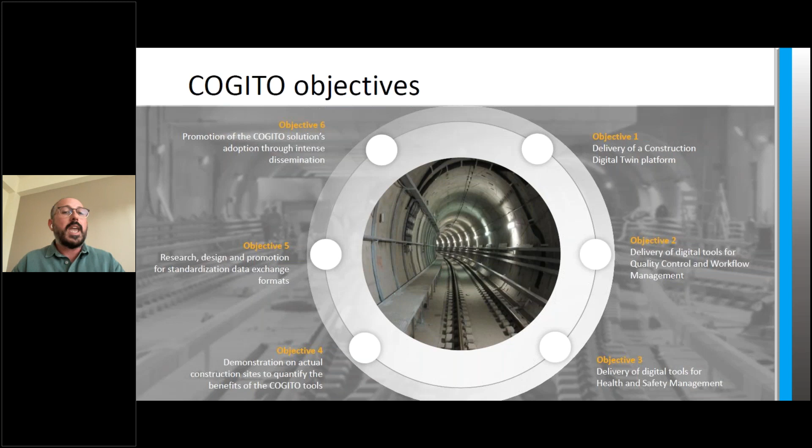Four technical objectives, fully aligned with the development and delivery of Cogito toolsets, and two business exploitation and knowledge transfer objectives have been set for the project implementation. The consortium so far has completed significant work aimed at delivering the key outputs associated with each.

Starting with objective number 4, suitable pre-validation and validation pilot sites have been identified and are currently being used to test many of the tools. From the pre-validation experiments and tests, significant learning has already been achieved that has led to various adjustments and corrections on the Cogito solution, input data requirements, and various Cogito tools' functionalities.

As for objective 5, Cogito aims to work with established standards towards large-scale adoption of the digital twin concept. In recent years, different standardization bodies have started working on the specification of standards for digital twins, and in the project we have followed and participated in such emerging initiatives, collaborating with our sister projects. Dissemination activities have focused on strong visibility of the Cogito project's tools and innovations in the construction industry at the European level.

Cooperation with the Building Digital Twin Association and StandICT allowed us to organize joint workshops and develop scientific papers with sister projects. Cogito representatives were promoting the project during several European and international events. Regarding the business approach and exploitation plans, Cogito partners developed business lean canvases following dissemination and exploitation manager instructions, and declared their intentions for exploiting the project's technical and non-technical results.

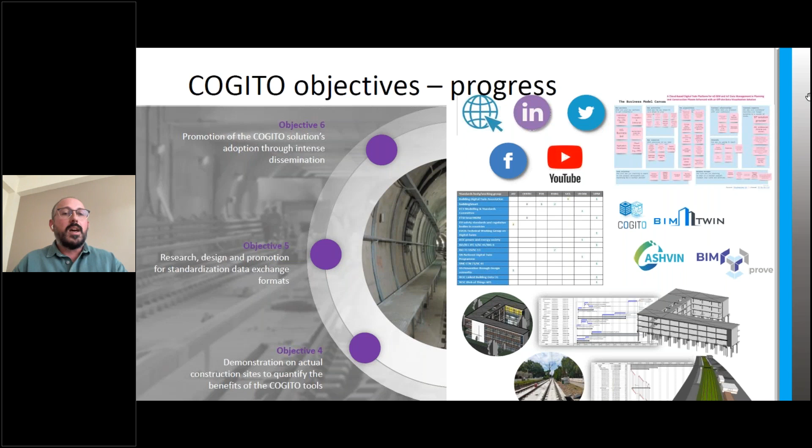In objective 1, the second and third versions of the Cogito data model and ontology definition, as well as interoperability design, the digital twin platforms that support both the necessary information management as well as the semantic and pragmatic alignment among the Cogito services and data processing systems.

The IoT data preprocessing tool gathers raw IoT data coming from sensorial devices installed on or worn on the construction site, and generates data sets that can be directly stored in the Cogito Digital Twin platform. The digital command center renders the 3D BIM model, IoT data, and other data and annotations generated by domain-specific digital twin applications like quality control, health and safety, and workflow management, all delivered so far.

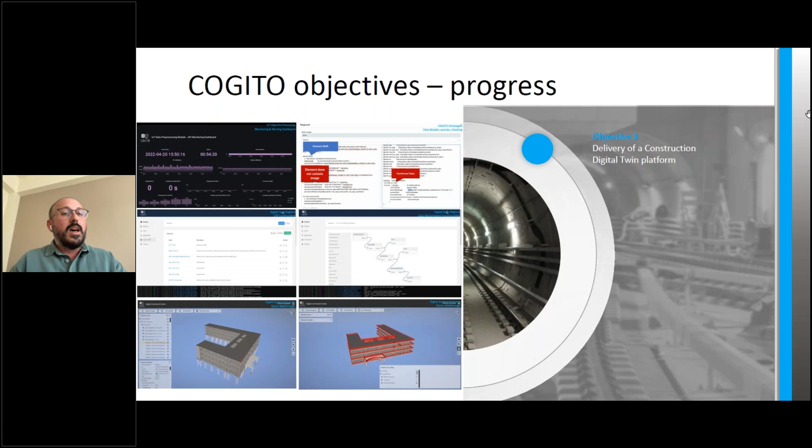As for objective 2, a tool used for defining work order templates, generating work orders, and executing or monitoring the defined workflow; a mobile app for supporting work order execution and reporting; a tool that allows the user to identify process steps that are critical for successful implementation of the project, exposing optimization opportunities to minimize time and cost; and a software package for commercial AR head-mounted displays to help visualize and interact in situ with the output of quality control tools, like severity of geometric visual defects, have also been delivered.

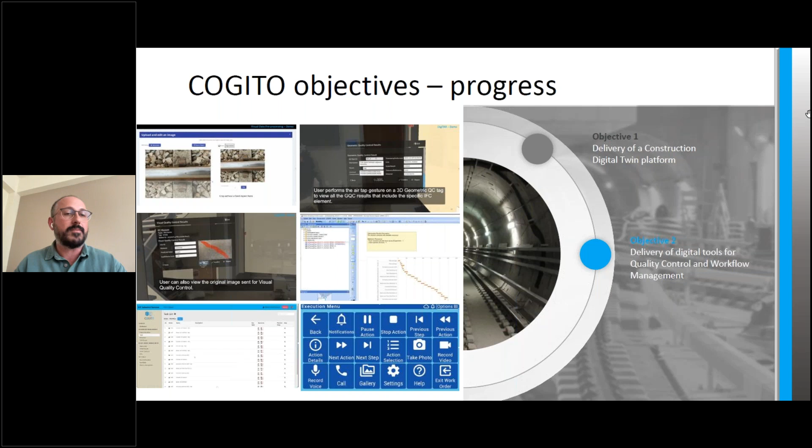Concluding this presentation, I would like to very briefly introduce the outcomes of objective 3, which will be further explained and presented in the next presentation given by Jochen.

I'm referring to the SafeConAI tool that identifies areas in the BIM model where hazards are, and suggests and adds mitigation measures to the model; the proactive safety tool that utilizes and analyzes location data of resources like equipment and personnel on the construction site to avoid close calls, accidents, and collateral damage; and the virtual safety tool that provides personalized construction safety education and training through an easy-to-use virtual reality environment.

That was the end of my presentation. Back to you, Emily.

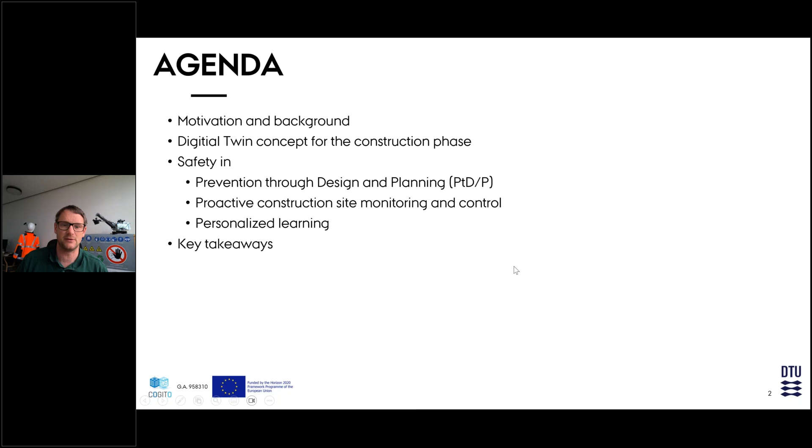The motivation, many of you are familiar with: construction is probably the most hazardous work environment that we have around the world, and especially fatalities occur. And numerous injuries, and a lot of attention has been put on close calls in the past decade, I would say, and still a lot of the injuries and fatalities and any incident is not going down to zero.

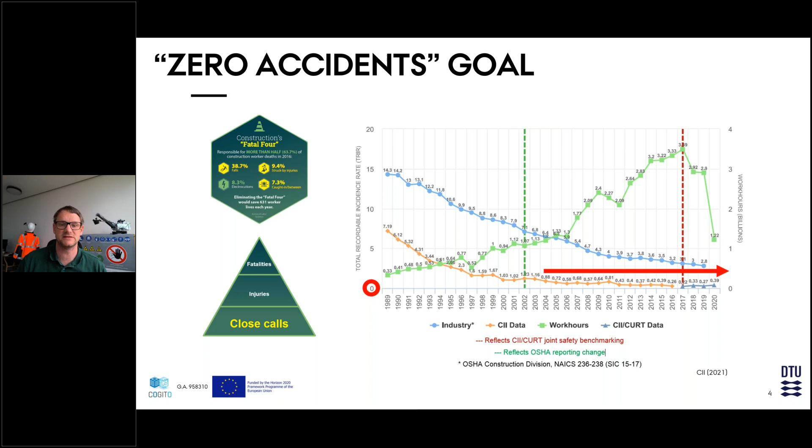Our goal is to actually use and create a digital twin that adds to the high-level control theories that exist for safety by complementing them with digitalization.

This is what a digital twin is all about. It's about capturing the current state of the art, actually thinking about how we can design safely and plan projects safely, collect data, even predict future events, and if they turn out to be dangerous, actually prevent them. And that's where this proactive avoidance comes in.

So digitalization should also not be seen as a replacement of workers, actually as a tool, as an aid to enhance the decision making. Why do I talk about that?

Just yesterday, there were 2 fatalities in Germany where a train actually ran into a work crew that was on the rail tracks. So it's actually quite an example that really has a lot of meaning for the COGITO project. So the next safety moment we have in the COGITO project, we want to devote to this tragic event that happened yesterday.

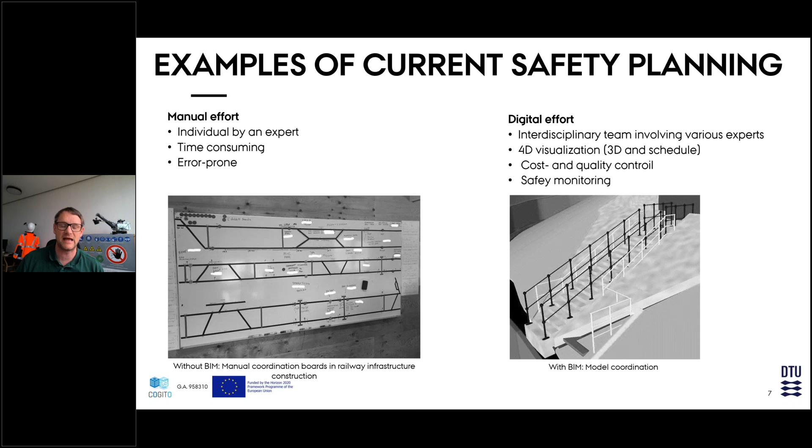And that's where COGITO is partially focusing on. So we want to get away with this by actually twinning safety and getting away from this linear approach, top down, like the CEO approving safety, rather thinking circular, like planning, monitoring, and making decisions better. That's what I think should be done to make the next project safe.

Then from experience to evidence, we have a lot of knowledge gathered over the past 30, 40 years. Construction is a very smart industry. We have a lot of best practices. We just need to capitalize on that. So we need to become evidence-based. That's what the digital twin is also about.

Yeah, we have a lot of data, but we just don't record it and use it. So we need to develop tools and methods to actually create evidence and then base our decision making and enhance it. And we need to be not reactive anymore, like I said, to safety statistics, rather being at the right time. It doesn't need to be real time, but at the right time.

Yeah, safety planning can happen upfront. Monitoring should happen probably in runtime, as quickly as technology is able to provide data from a construction site. And decisions should be then given real time if a worker is at imminent danger, or maybe a bit later when a safety manager wants to pull a record. How have we performed this week? So that's what a digital twin is about.

So let me show you a little bit of how our work package in COGITO is managed. And again, I don't have the time to explain this in detail, because we connect to the construction site. We also connect to a whole bunch of tools that are part of the digital twin platform, other tools that do work site planning, work process planning.

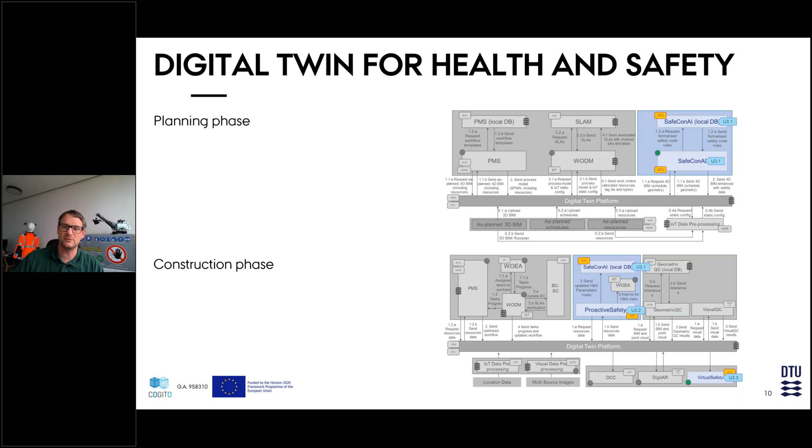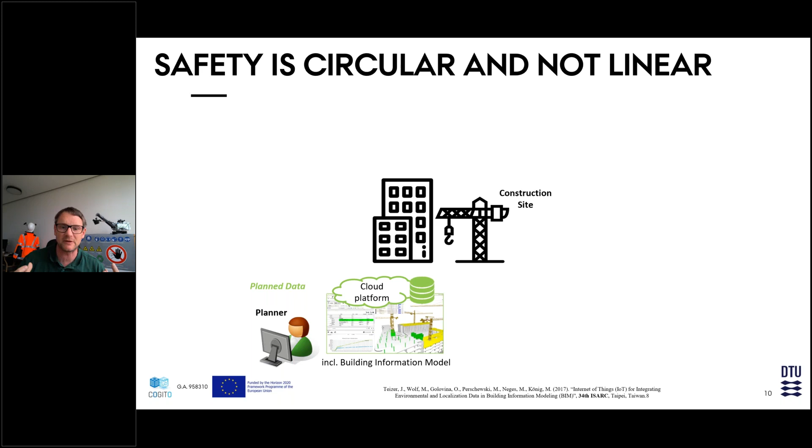We tie in on two levels: the planning phase and the construction phase. I've simplified this to give a better understanding. Here's a construction site. We develop safety tools for building information, which are 4D models containing geometric information as well as schedule information. We tie into that, capitalizing on already existing digital information.

We want to give work crews plans so they know where to go and how to work safely. We also want to give them tools and devices where they can report or be informed of hazards and how to avoid them. Furthermore, any data we record about ongoing activities on a job site, we record and analyze, and give safety management or construction project management advice on how to improve it.

What we don't want to forget, the last piece in the puzzle, is education and training. It starts at the elementary level and goes into higher education, or even vocational schools. There's a big effort that COGITO also focuses on: advancing the safety behavior of workers through training. And then the next project, of course, can be planned.

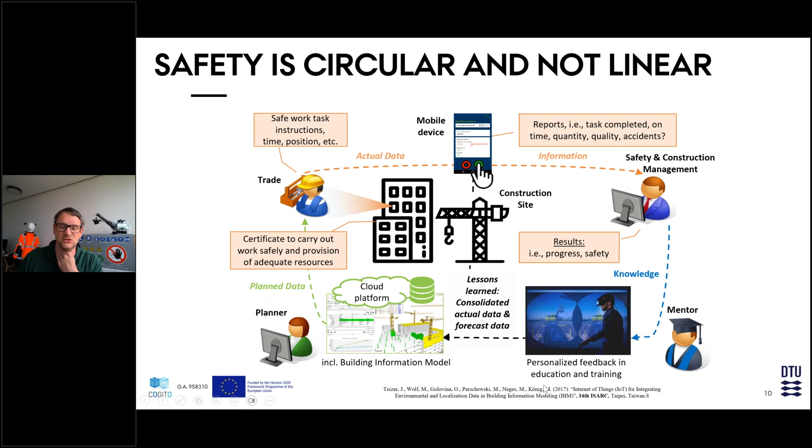So I started with the first of the three levels, the planning effort. What do we do in COGITO on safety planning? This we call SafeCon AI, and it basically deals with prevention through design and planning. Many of you are familiar with the prevention through design concept, but I think this planning is important because in construction we plan a job site just before the work tasks are actually executed.

Maybe we start here at the top left. You see a safety rule for fall protection. That's just an example. We deal with a couple of different matters in COGITO, predominantly heavy equipment to pedestrian workforce interaction. But I've picked this one because it's one of the pilot sites we have in COGITO, in Copenhagen, which is building or extending its metro.

We've taken a new subway station. We have models, and this is a simplified model—a very rough one. But even that one we can utilize to analyze hazards that relate to fall protection.

As we know, safety planners or people who prepare the work phase have a lot of things to do but limited time to do it. Here we create a tool that assists them in detecting fall hazards and implementing guardrails. So we detect walkable surfaces and spaces, fall surfaces and spaces, and tell where the guardrail has to go. In the end, for people who don't really care about technical matters, all that matters is where it goes, what qualities you need, and maybe the cost or investment necessary. I think that's the bottom line for people in the field, and maybe tie that to a 4D schedule.

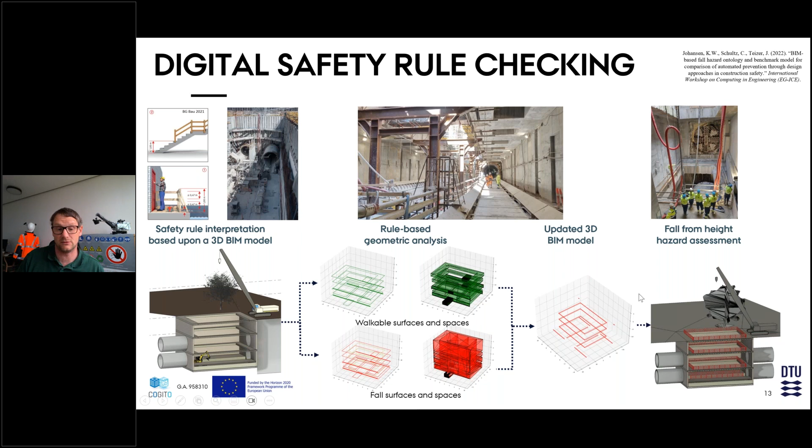I want to give you a visual. It's not from an infrastructure project, but in COGITO we also explored high-rise buildings a little bit. Here you see the difference between a typical BIM model, shown on the left, and once our algorithm has performed, what the result is. Here you see the guardrails being shown right away, and of course any of the quantities can be taken off, like you typically do in building information modeling and estimating.

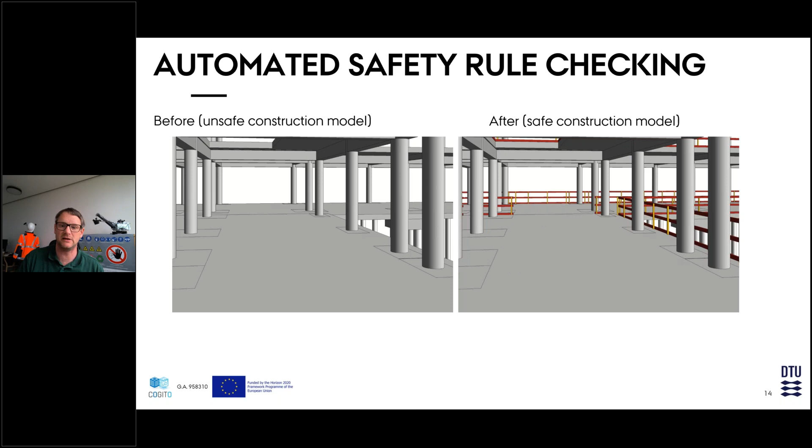Going back, we have pilot demonstration sites throughout the project. We closed out one a couple months ago, a light rail project. You see here the light rail, the two rails. There's an underpass below the rails and some buildings that have been worked on the roof, but also some other hazards we can identify.

This is just a result of how a site safety plan or safe site layout plan can be created with very little effort. This model, once we process it, takes 34 seconds to yield this result. You see here the guardrail—it's almost according to code, I would say. Of course we always have ways to improve, but it can be done, and it can assist a safety planner by generating such models.

That's a big step forward, because safety planning is either not done frequently on a construction site, or just once in the beginning, and then someone is expected to understand how it progresses over time. So that's a big step forward.

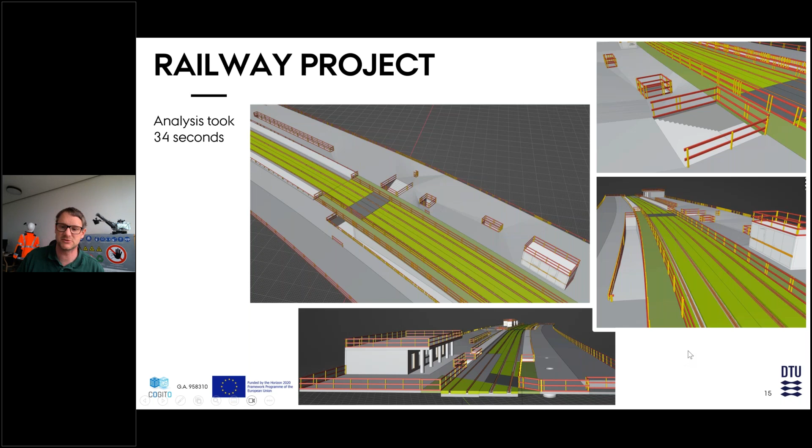A feedback we got is to update it more frequently than it's currently done. This is a component we are still working on, and our project is still running for a couple of months. Our next pilot job sites will be ready to implement the next level of our tool.

So a truly working digital twin has to do much more than doing safety rule checking, like shown earlier, or connecting models and drawing quantities. No, it has to do much more, because it has to end up with the human.

Assuming that we observe, or are close to observing, a close call, typically workforce reports that, the on-site safety professional further pushes it up the chain, and enters it maybe in a close call database where a peer review team makes a decision. As I've explained, it takes almost forever, as some workers told us, for them to get feedback on how they actually should have performed more safely.

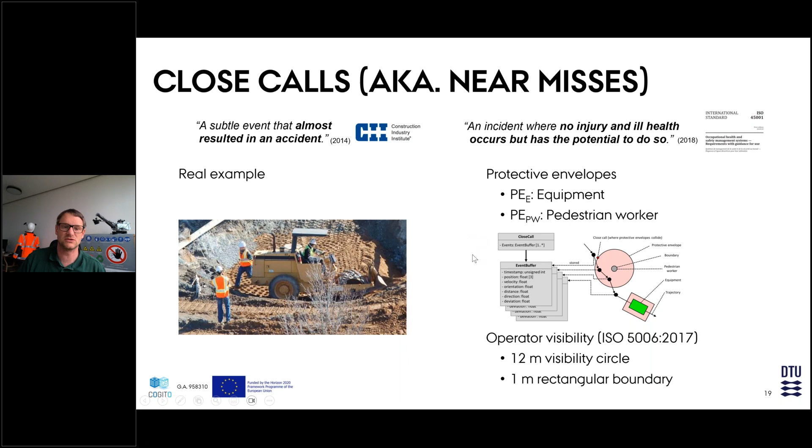We further take this data and utilize satellite images. We take point clouds from drones or from laser scanning, from terrestrial laser scanning, and we fuse this with trajectory information. This trajectory information can come from any source. As a matter of fact, in Cogito we heavily focus on RTK GNSS solutions for the outdoor environment in construction sites, but also on Bluetooth Low Energy for interior. Those who are familiar with the technology know every technology has disadvantages and advantages, and some will work better than others. That has to be considered, but the technology is ready.

For our part, this is a research project that tries to test out and collect feedback. Of course, we are not making a policy that it should be allowed to track workers, but we need to solve that bottleneck. Eventually, we may not track workers all the time, but maybe give them a day, half day, or a couple of hours of training where we put these devices on them. It might be enough to sensitize them and make a change in their behavior possible.

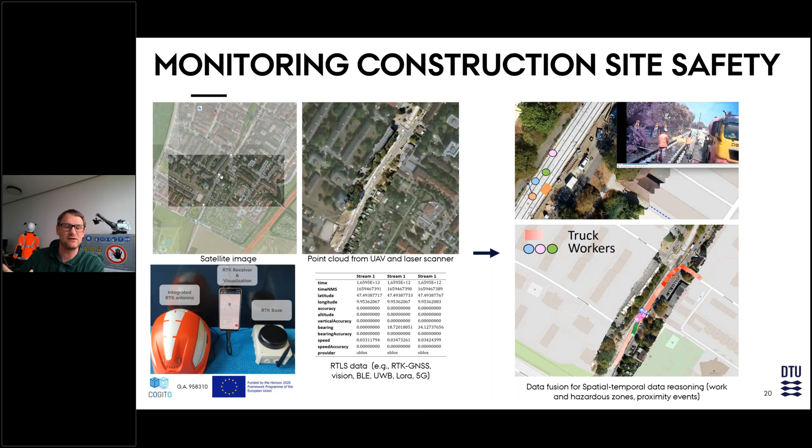Here you see some early results. On the left-hand side, some manually annotated observations. Again, we could use computer vision approaches to track these entities. That's not a problem anymore.

On the right-hand side, you see that our algorithms developed within COGITO actually allow you to pinpoint the location where close calls have occurred, where a worker and the equipment, when the equipment was arriving, got very close. Still in the environment we had out there in a safe way, but probably it should not have occurred that this equipment got so close to a pedestrian worker.

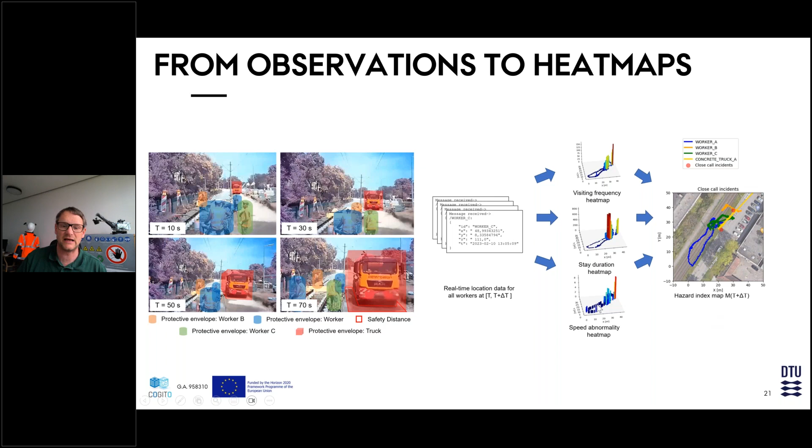There's a lot of data that will be recorded, a lot of data that can be analyzed. Actually, we intend on coming up with solutions about standardized protective envelopes for equipment and workers.

Here's an example from a rail project in Germany. There's also data from work crews that have been working on a high-speed rail track, and you see here plenty of observations where workers are close to equipment. This just indicates, well, this was new construction, but assume this would be a live track - they should have never gone to the other track over there. So data that we recorded can be utilized for such case studies.

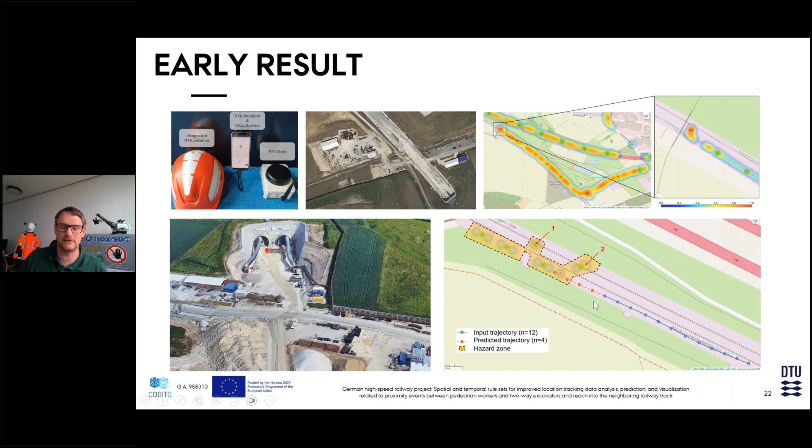Now, I've shown the planning effort, I've shown a little bit about what we do with monitoring and proactive alerting by creating heat maps and other relevant data. Let's go a little bit into virtual safety.

On that end, we actually focus on advancing the training environment. You're all probably familiar with instructions, whether on-site or in a classroom - it can be quite boring to listen to a PowerPoint presentation for a while. Or, as this company has done, you get on-site training where they have little mock-ups you have to train on once a month, and everybody is forced, otherwise they're not allowed to work on the job site. We see this trend away from passive listening, viewing images, watching videos, or demonstrations, towards more hands-on exercises.

As a matter of fact, we have worked with vocational schools to employ the gamification principle, which uses somewhat the extended realities. Extended realities includes components like virtual reality, augmented reality, or even augmented virtuality. In COGITO, we focus on a subset of virtual reality, which is a third-person reality environment, where you are playing on a computer screen and actually see the person walking from a rear perspective.

You will see a video in a second, which hopefully makes sense. But this gamification allows people to very well observe a job site and behave in a way that performs a work task.

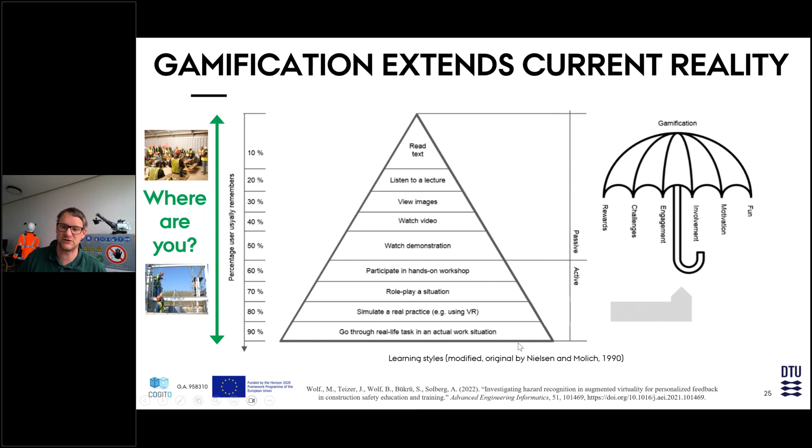What's so novel about this training environment? Actually, it's quite difficult to create these virtual reality training environments - it takes a lot of time and resources, and it's expensive. Our goal in COGITO is to simplify it, to take the component we got from SafeCon AI. As you've seen in SafeCon AI, we were able to capture the hazardous spaces and the fall protection spaces. In case of an infrastructure project, this would be maybe around a machine, the protective envelope.

But we are able to capitalize on this piece of information we generated and import it together with the IFC model into the gaming engine. In our case, we use Unity, but all of that is done more or less automatically.

And here is the training scene. The health safety environment trainer has a little chance to modify it, for example by clicking and saying, I want to have that many hazards, these types of hazards, located here and here. That's all possible. Then the interaction happens with the trainee.

The trainee is actually exposed to the scene, and we don't use the scene just for visualization purposes like most people do with headsets, with virtual reality headsets. No, we also collect data about the participants while they are in the training scenario performing their tasks.

And that we capitalize. Again, it's a data set that is almost similar to the real world, because we try to create these training environments as realistic as possible, and even though sometimes a bit playful, we have figured out that workers, or actually apprentices in that case, were quite happy with the level of detail that we provided. It was realistic for them, but we capitalize information that looks very similar to reality.

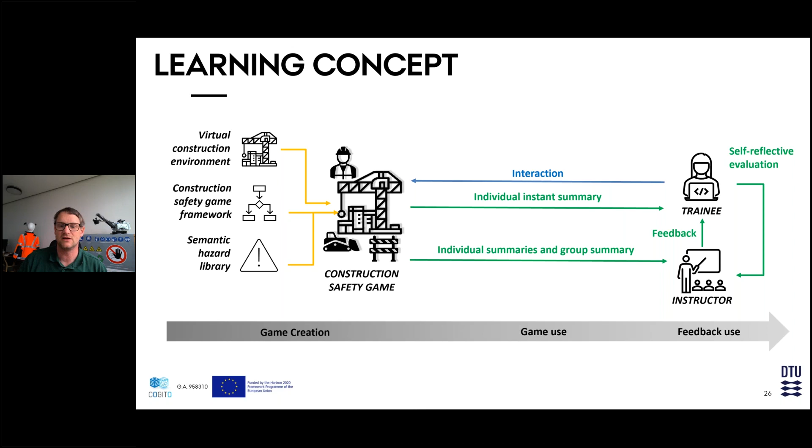Okay, let me show you this. Just to conclude on this a little bit, the intent is that the attendees get a chance to get objective feedback and self-assess their performance, and furthermore, that an instructor provides more objective feedback to them, so they really gain trust in what is being told to them, and that should also increase their safe behavior in the long run.

As you can see here, very similar to the SafeCon AI. This is the model, and we have imported that, and so we have here some hazards. These were manually placed because we don't know which type of two-way excavator is actually being utilized, so that has to be properly defined by the project.

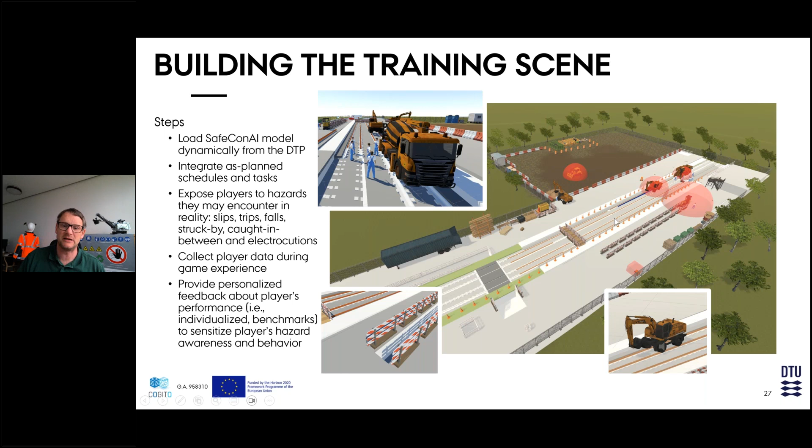And you can see here already, multiple things that have to happen. For example, you have to walk around. You probably go by this unprotected leading edge, and you probably have to go and pick it up here and put it in one of the recycling containers back over here. And as you do that, you perform tasks that probably put you at risk, whether you're aware of it or not. It doesn't matter in the first place, but that's the kind of goal of this game.

As you see here, first, of course, we give those who are not experienced with third-person views or virtual reality a training in the tutorial, and then they go actually into the scene. As you can see here, there's a little bit of a guardrail missing. You'll see it in a second much better, in much more detail.

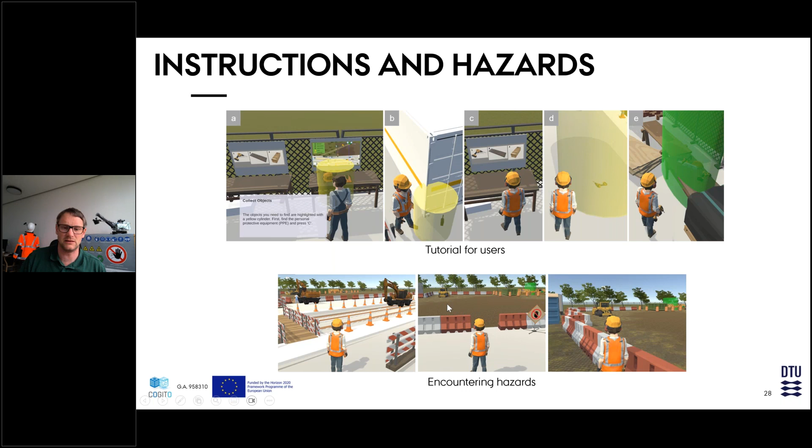You see you have two ways crossing this rail track, either through the safe bridge or this temporary bridge that was built, or you cross through the traffic that may encounter here. You also have here the recycling containers back here, where you bypass actually a dozer that levels the ground.

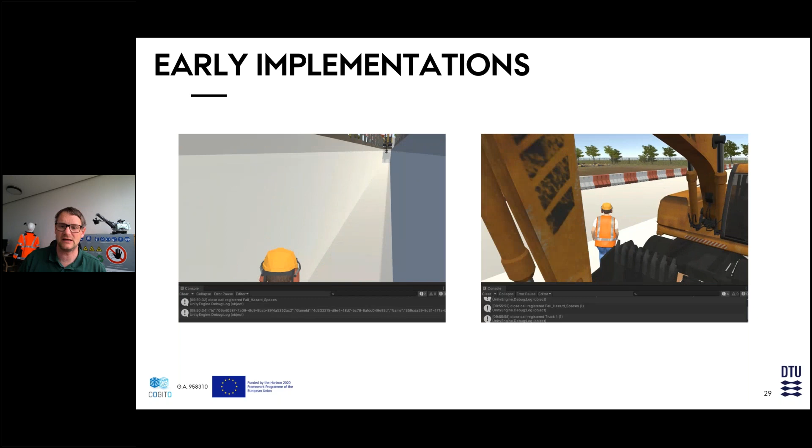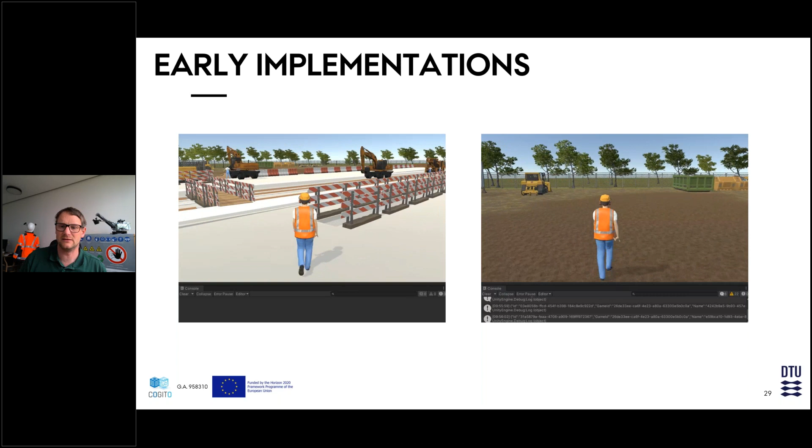Yeah, I'll show you these videos. They run simultaneously. Maybe focus first on the left. You see here somebody didn't observe it and falls. Our scene is actually more dramatic now, so we are constantly evolving that. And here on the right-hand side, you see somebody walking inside the area where the dozer has bypassed this excavator, barely got out of the way, and now that worker is on the way to get to the recycling containers, and of course that person shouldn't be in that area.

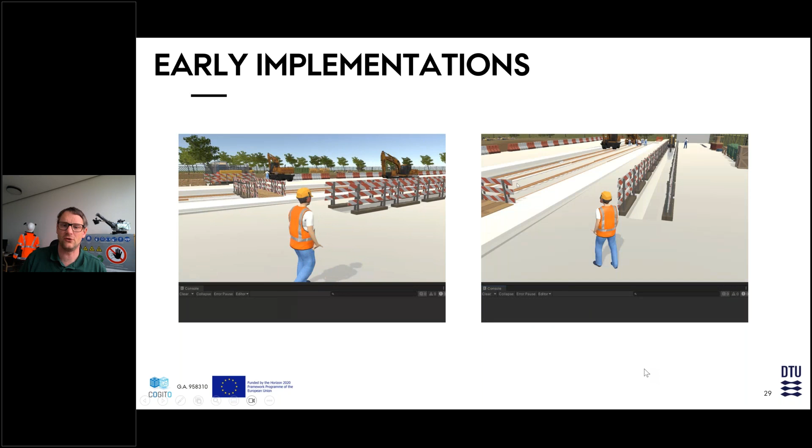Maybe it would be good to follow up with us in the near future. We will probably post more videos of this as the tool has become much more sophisticated, and of course it looks a bit more advanced than actually I'm showing here right now.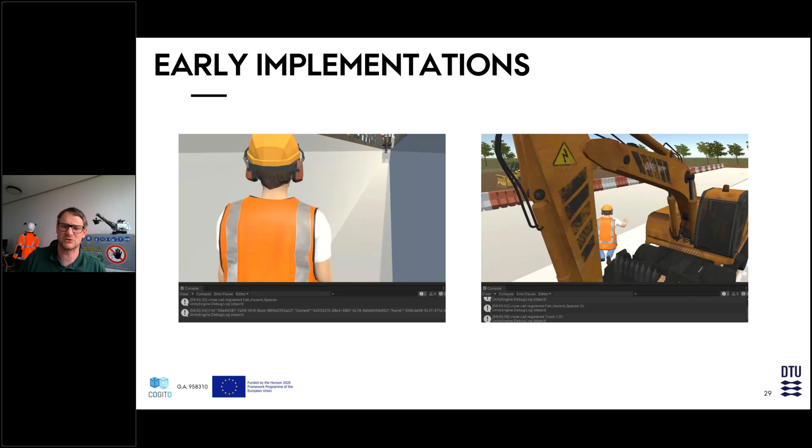So actually, we don't just end there with the training. We could actually go back to SafeCon AI and enhance the planning effort by having people just play this.

Now, if I go back to the earlier tragic example I talked about, where two workers got killed just yesterday, think about if the workers would have had a chance. I mean those two who got killed, because the other five got a big shock. But think about if this entire work crew would have been able to exercise such a training before, and also think about the constraint on the work time they had available on this rail track, and maybe Deutsche Bahn could have actually also put a schedule in when the trains will start running again. Probably such an accident could be avoided, by alerting everybody again.

Have we implemented the right measures to prevent such accidents? Again, this is a preliminary screenshot of one of our user interfaces that is more geared towards the trainer, which then shares feedback with the participants.

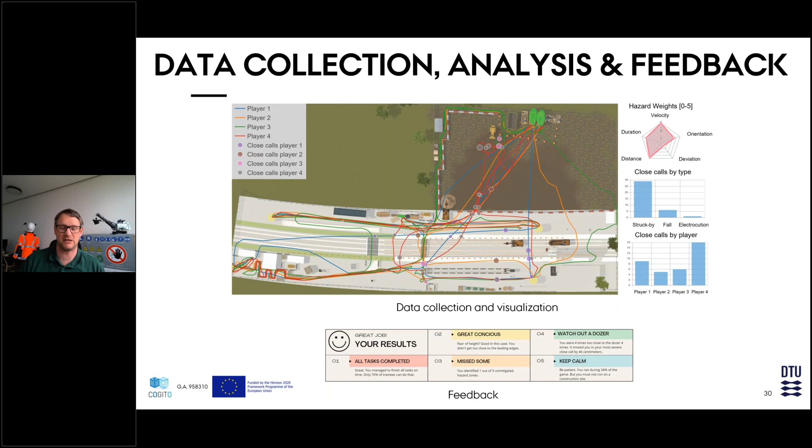And I think that's something we learn in COGITO and in other projects, that positive feedback should also be mentioned. So in a summary and an outlook, I showed 3 parts: the planning, the proactive monitoring and analysis and control, but also some of the training efforts.

What are the key takeaways? Unfortunately, government mandated definitions and requirements for safety are only one of the practices that we should employ nowadays. Digital twins can offer so much more. The content and the methods for safety, however, are currently not built for the digital world.

The current methods are stale, static, even asynchronous, maybe just for one person meant and not for a work crew. Traditional tools cannot adapt to the feature constrained, non-interactive and fractured products that we have out there. The construction industry is very fragmented, yeah.

And furthermore, we have a lack of skilled labor. The users in the end are changing. They're demanding now interactive, high fidelity and contextualized content. This is what digital twins can enable. BIM is not static anymore. BIM becomes dynamic. And that's what we call then a digital twin.

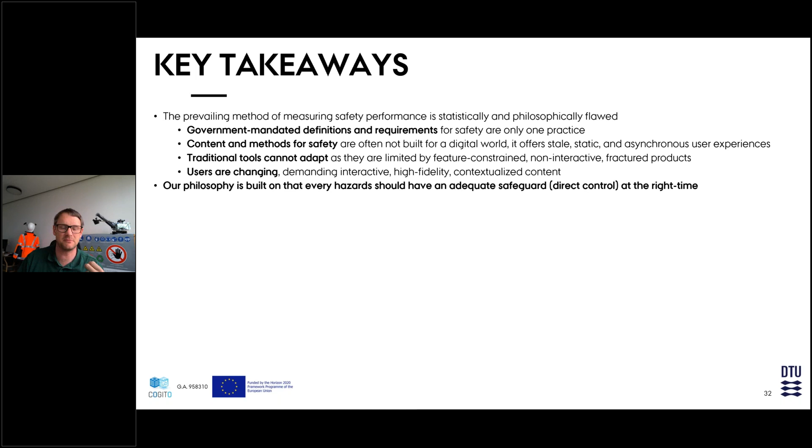Furthermore, we actually do prediction. That's very important. This prediction to avoid future potential accidents is, I think, a key of our work package. So our philosophy is to build on that every hazard should have an adequate safeguard, direct control and measure that can be applied at the right time, not necessarily real time.

I've shown the 3 tools: design and planning, proactive monitoring and control, and personalized feedback. Even though that was short, I must say technology is seen as an enabler, not as a replacement of workforce. It supports data gathering, analysis and forecasting, knowledge-based decision making. That's the focus. That's the key goal that we want to accomplish.

And maybe a little bit of an outlook. I mean, we still have time left. Our sister projects have a little bit time left. There's well-established industry practices in place and processes. They require change. A good thing about this EU mandate and the EU taxonomy that is coming up, even though

it doesn't impact the construction phase quite yet, is this demand for documenting your efforts or your activities in much higher level, at a much higher level than seen before. And that will drive change. And if you do this change, you have to rethink your processes.

It starts there. It also starts with your minds, with your safety culture in the company, where you learn and advance together by sharing. There is no competitive advantage if you get workers hurt. It costs you money. We can prove that an investment in safety, I'm not talking about cost, an investment in safety, it yields at least a 3 to 4 to 1 return compared to not doing it.

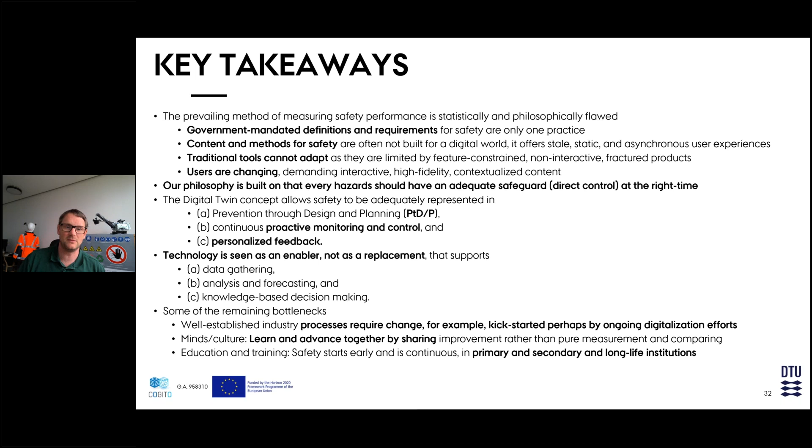Last but not least, yes, while your world out there, if you're a practitioner, is our laboratory, because we like to come to you. You should always value that the human capital, especially in these days, is probably the most scarce resource and the most important resource that you should focus on. So safety and health is a key component, I guess, on COGITO, not just safety and health, but any other of the topics like quality, productivity, progress monitoring, and so on. Thank you so much.